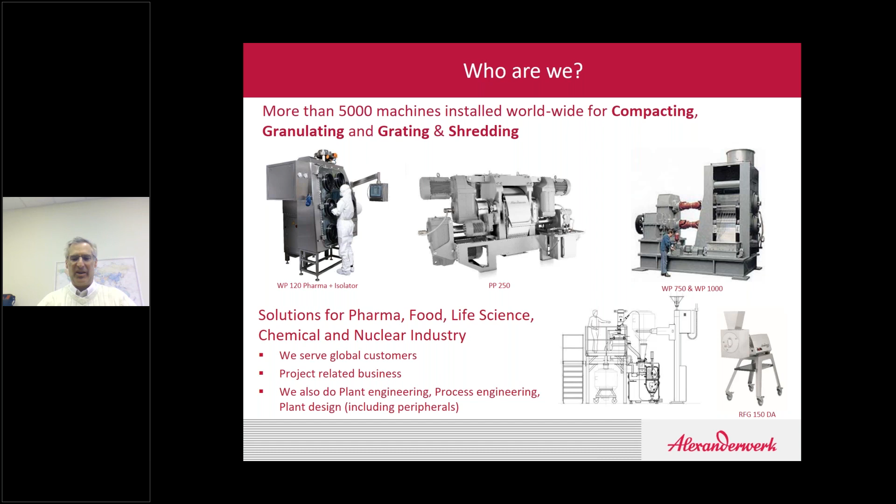Just to give you a quick background, Alexanderwerk was founded about 130 years ago. We specifically focus today on selling roller compaction equipment throughout the entire world, focused on pharmaceutical, fine chemical, life science, and nuclear industries. We cover literally the entire world. Our headquarters are in Remscheid, Germany, and our American operation is about a half an hour north of Philadelphia.

So what were we doing? We were looking at trying to take a powder material, which was very fine in form, and convert that into a free-flowing granule. I'll talk a little bit about why we're doing that, and there are many reasons. So we're taking a powder, and just through compression, we're compressing that powder into flakes. Those flakes are then gently milled up into what's known as granules, and the granules go on to one of Robert's tablet presses, and we make tablets from those granules.

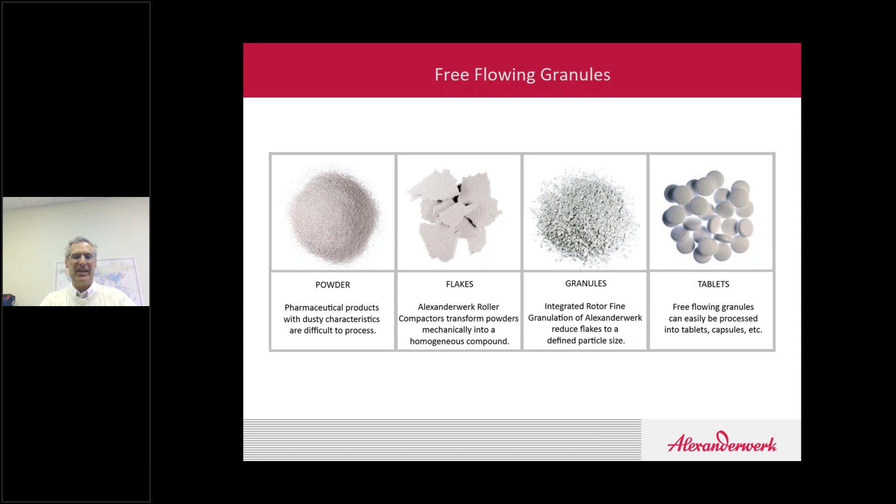One of the key reasons for making granules is to enhance the flowability. Some of you may know, tablet presses run at a very high speed - they can run in excess of 250,000 tablets per hour. So the material must flow into the tablet presses uniformly and smoothly. One of the main reasons we prepare granules is to avoid segregation. You have to have a very homogeneous mixture of material going into the tablet press, otherwise you'll have an underdose or an overdose of the material coming out.

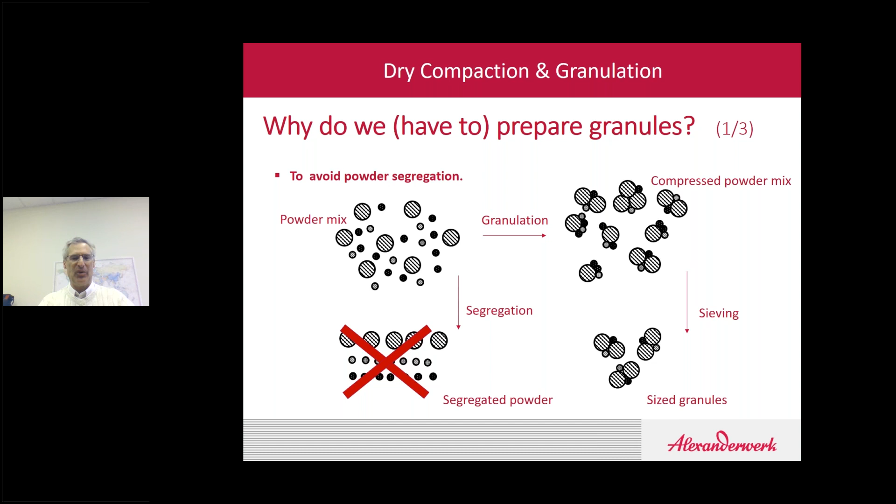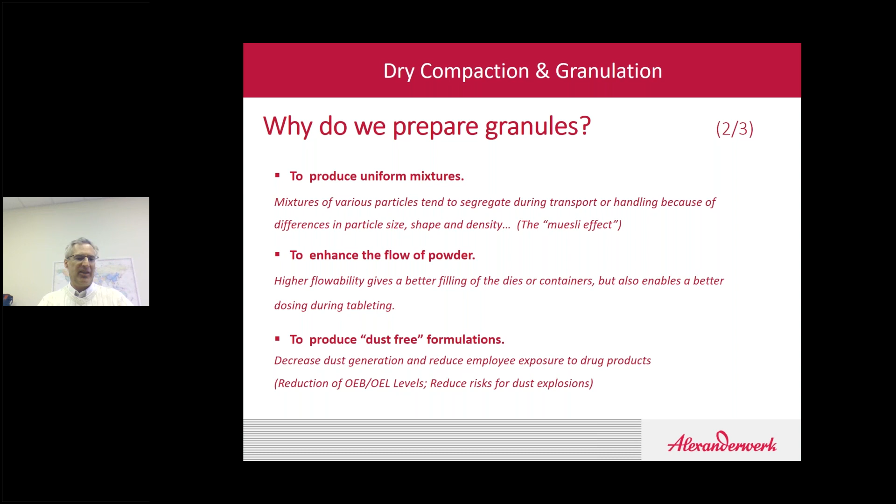So we want to make sure the powder doesn't segregate as we move to the next process step. Other reasons we prepare granules are to produce uniform mixtures, enhance the flow of the powder, and also to make a dust-free formulation. Today, you hear quite often in the industry that OEB or OEL levels are always a concern, and dust is always going to be a problem. You have to address that - the more dust you have, the larger the concerns for OEB or OEL exposure risk.

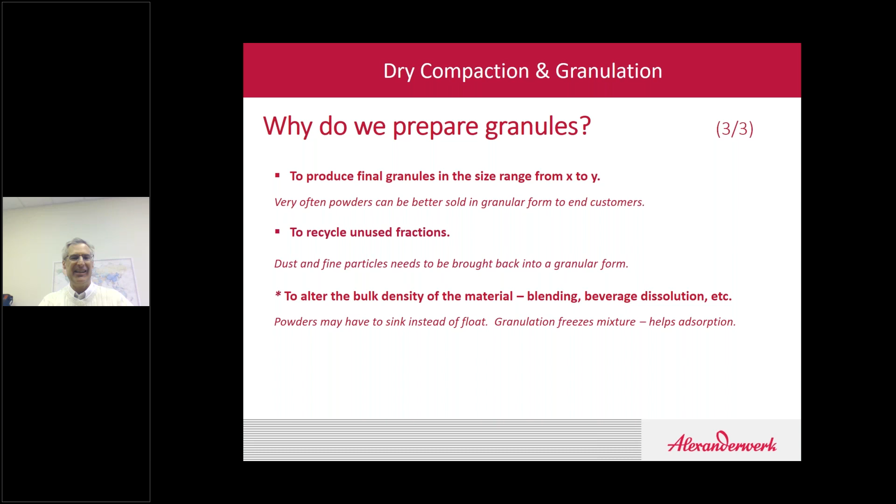Some other reasons: we may want to produce a final granule in a certain particle size distribution range from X to Y. We may also want to recirculate some unused fractions of a material, and sometimes we have to roller compact material, or dry granulate, to alter the bulk density of the material. This can get into a long discussion, but basically what you're trying to do is target having all the material going into your final blend be a similar bulk density and similar size so you can avoid segregation concerns.

So how do you prepare granules? There are three different methods, and Rob and I looked at a couple different methods. What we're going to be discussing in the next 20 minutes is how you do it using dry granulation. Sometimes you can just do a direct compression, which is easy and quick, but it doesn't always work. Then you may opt for a more intense method, which would be dry granulation. And then also there's wet granulation, which is the most involved method.

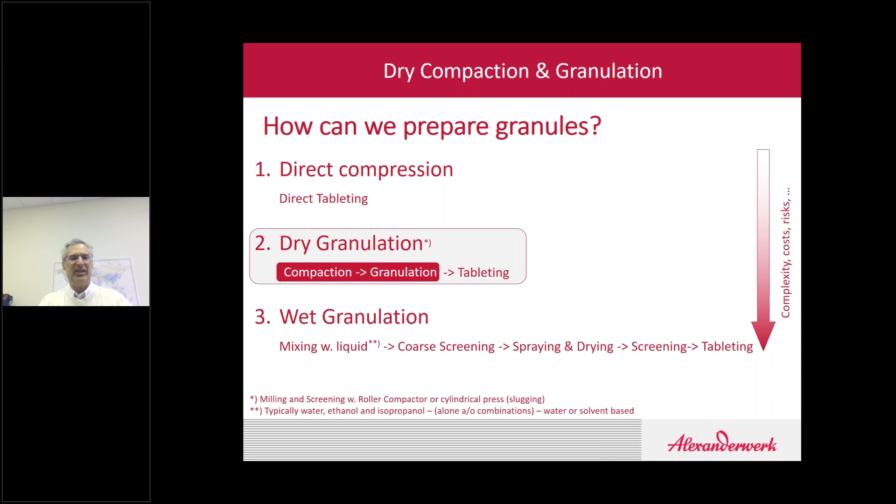So today let's talk about dry granulation using roller compaction technology. Dry granulation using a roller compactor is actually a continuous process. Alexanderwerk has quite a few machines that run on a 24/7 basis, mostly in the fine chemical industry, but it could be done in the pharma industry also. So it's a continuous process, and it's very reproducible. When you run a roller compaction process, providing you have the same input parameters and the same machine parameters, it's going to be a very reproducible outcome.

Interestingly enough, doing roller compaction, you don't need any additional binders or water or other types of binders that may be available. It's simply a system or technology that uses the van der Waals forces between molecules to compress those molecules together and hold them into a solid flake, which we then grind up into a smaller granule. Another major benefit is there's no additional thermal processing required.

So if you have very heat-sensitive APIs or volatiles in there, there is no thermal concern about the material being processed. A lot of customers ask, what kind of a delta T do I see across the system as I'm running a roller compaction process? Typically it's limited to about 3, 5, 10 degrees Celsius, maybe from beginning to end.

It's very low energy consumption, obviously, since we're not putting a lot of heat into the product. We don't need to spend a lot of energy to do this operation. Low investment costs when you look at it versus wet granulation, and it's a very small space or footprint that's required to have this technology on board.

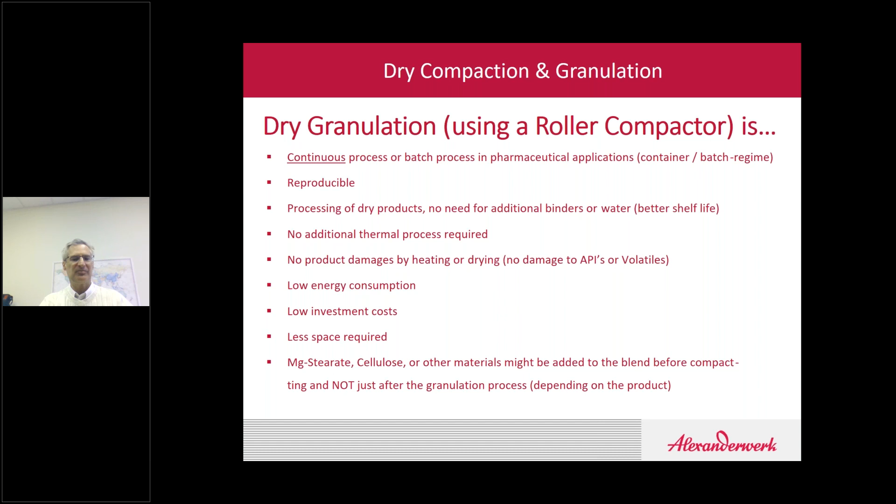So what's actually happening in roller compaction? Here's where it gets interesting. What we're doing in a roller compactor is we're taking two counter-rotating rolls and we're presenting material to these two counter-rotating rolls. The material enters these two counter-rotating rolls in an area that's first called the slip region, and then the nip region.

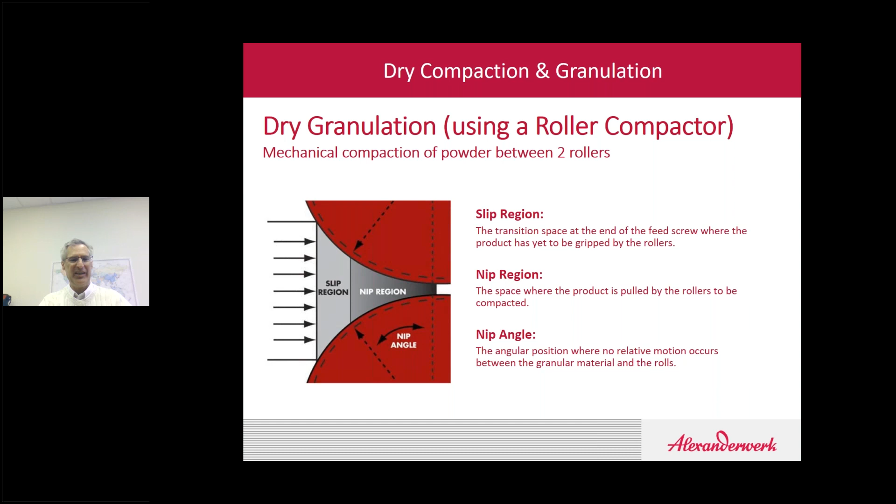So in the slip region, the particles are rearranging themselves, basically finding a space that they can fit into. And then in the nip region, the particles have no more mobility. They're simply being compressed, to the point where the two counter-rotating rolls are at their smallest point, and that's going to also determine the thickness of the flake coming out of the machine.

Interesting view here. If you take a look at one of the machines that we have, it's a WP120 pictured here. You can see the pictorial diagram on the left-hand side, and on the right-hand side an actual cutaway view of the machine. What we've done is removed one of the side seals of the machine.

So you can see in the middle there, there's the outlet of the feed system. The powder, as you can see, is getting compressed, and directly there is a very definitive line of where the powder has actually started to compress into the flake form. That's where that region transfers from the slip region into the nip region. We'll talk more about that in the upcoming slides also.

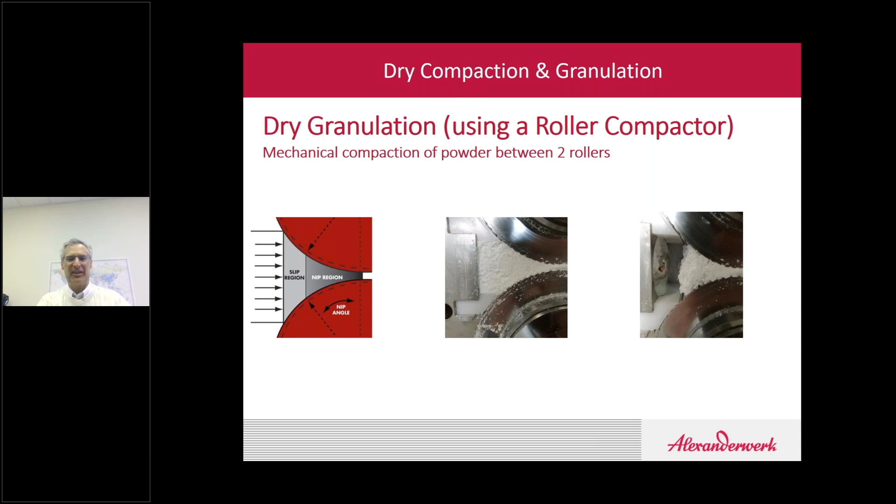The Alexanderwerk machines actually have vertically aligned rolls and a horizontal feed screw. There are some distinct advantages to this technology because we use our feed screw more as a metering screw. We're actually removing the effects of gravity.

So when you're processing a large batch, and in the beginning, if you're feeding with an IBC for example, you may have say 3 or 4 or 5 feet of head height of material over your feed screw. By using a horizontal feed screw, it takes away the effect of gravity. So we don't want to see a higher pre-compression at the beginning of the batch versus the end. For that reason, our technology using the horizontal feed screw is very favorable.

The two counter-rotating rolls are interesting to talk about also. They give you a specific advantage when it comes to separation of side seal leakages. Although it's typically minimized on the Alexanderwerk design, if you do have any material that leaks out between the vertically oriented roll assemblies, you can take that material and divert it away from the rest of the process and recycle it back instead of running it through the granulation mills.

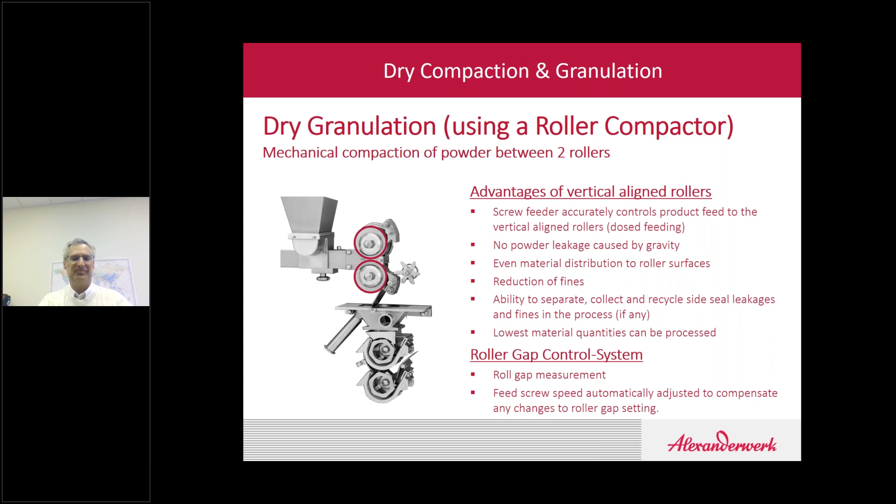Let's take a little bit closer look at the granulation aspect of the Alexanderwerk machines. We talked about the compaction, which happens between the two counter-rotating rolls, and the key to granulation actually is to take those flakes and mill them into a granule. I actually find the milling aspect of it a little bit more challenging sometimes than the compression aspect.

And the way Alexanderwerk handles this is we have actually a multi-stage granulation system. So the material will exit out from the counter-rotating rolls in what we call flakes. Those flakes are gently milled up at first by what's known as a flake crusher. It's basically a rotating set of knives or rotating set of fingers that rotate very slowly, about 50 RPM roughly.

Once those flakes exit the flake crusher area, it falls into a two-stage size reduction or granulation step. We call these the RFGs, or rotor fine granulators. The first granulator the material sees has a screen that's roughly 3 or 3.15 millimeters, reducing the half-inch flakes down to about 3 millimeters. The lower screen in the bottom RFG controls the top size of your material, typically about 1, 1.2, or 1.5 millimeters, depending on the process we're running. By using this multi-step size reduction concept, we generate the minimal amount of fines possible.

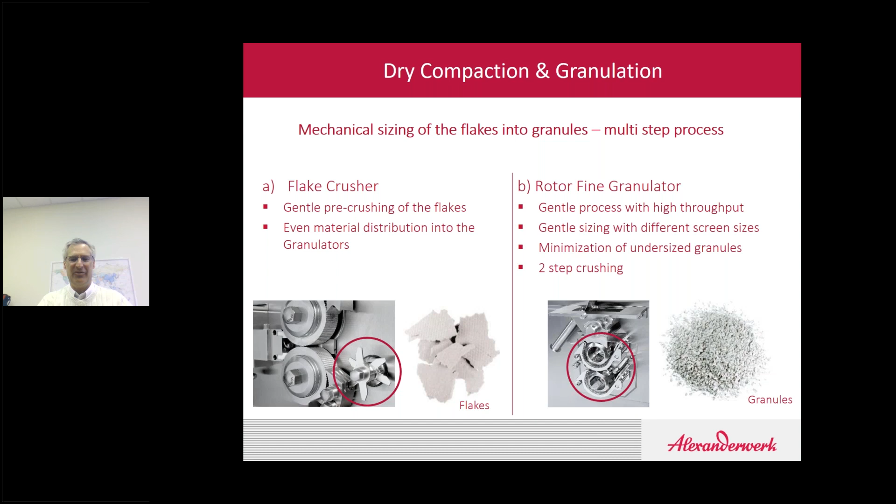Let's look at a side view cutaway of the actual roller compactor again. You can see it has the horizontal feed screw I talked about, but the feed hopper is an interesting design, called the combi vent feeder, a combination vent and feeding system. As the material travels down through the feed screw and gets presented to the rolls, the air has to go somewhere. Remember, we're compressing and compacting the material, removing air from it. Interestingly, with this design, the air actually travels back through the center of the feed screw and exits out the back section of the combi vent feeder. It's an interesting phenomenon to watch, and it works very, very well. It's actually a patented design from Alexanderwerk.

To enhance removal of air from the product, we use vacuum at the end of the feed screw. The vacuum has a twofold benefit: one is to aid in deaeration, but the bigger benefit is to pull the material out against the side of the feed screw housing. By doing that, the feed screw acts more as a metering screw. Instead of the material spinning with the feed screw, it's stuck to the outside of the housing, and as the feed screw passes by each revolution, it grabs that material and transports it right to the counter-rotating rolls. Using this technology, we have a very accurate transport system to the counter-rotating roll assemblies, giving you a very uniform product.

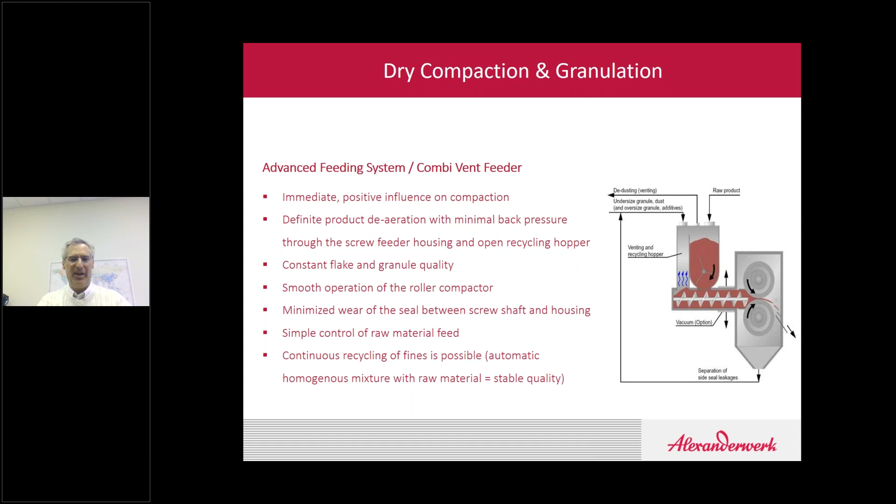Let's take a closer look at the vacuum deaeration system. This is a side view from a system with a dual feed screw setup. You can see the vacuum ports or housing right before the roll assembly on the far side. It's typically a sintered metal element of very fine porosity, so we're not pulling any product through it into the vacuum filter.

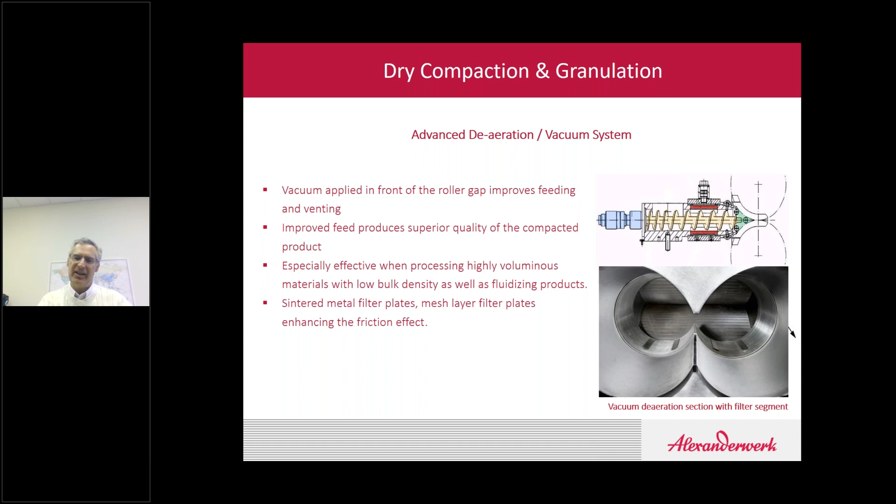What are we actually trying to achieve? The goal of having a good feed system or metering system to the roller compactor is to produce a very uniform flake. Looking at the two pictorial diagrams here, they're actually NIR analysis. On the one on the left, you can see the sides of the flake for this particular design were kind of weak. The red you see in the center is what we're looking for. When we run the vacuum and have the system optimized, you get a very uniform flake density, like you see on the right-hand side.

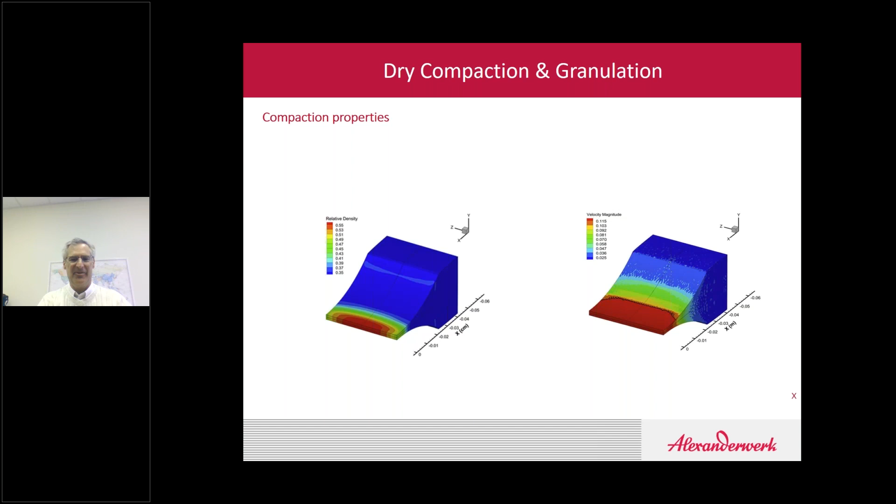So what are we actually doing in roller compaction? Dry granulation using a roller compactor really is changing the bulk density of the material. We're going to look at this more closely and get into the theory by defining alpha. Let's call alpha the compaction or densification, which is the volume in divided by the volume out — the volume of material fed into the machine divided by the volume out of the machine.

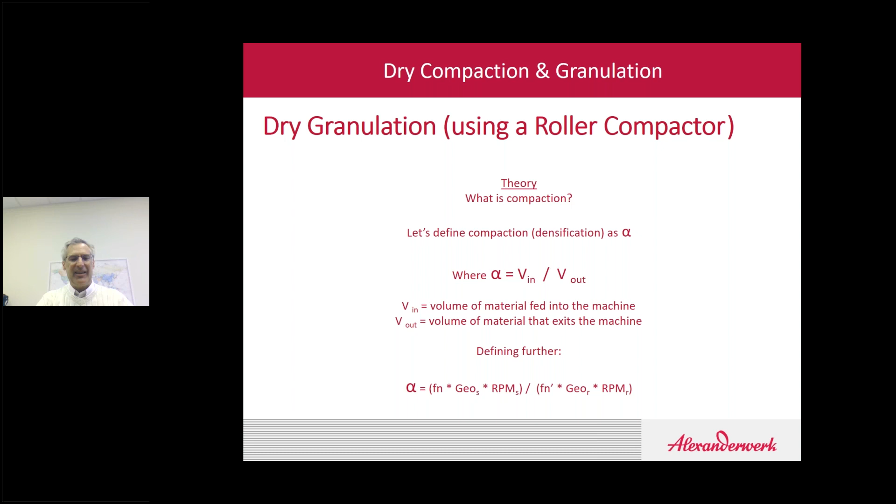If you want to look at this in terms of mathematics, we can throw in some geometrical and speed designs. Simplifying this in the interest of time, alpha is a function of the feed screw speed divided by the roll speed, times a constant, assuming the gap is held constant. So if you want to increase the density while the system is running, you could increase the feed screw speed or decrease the roll speed. If you want to decrease the density, you could decrease the feed screw speed or increase the roll speed.

You're always trying to work on that particular constant known as alpha and change that from one level to another. So theoretically, if you want to double your throughput, you could double the feed screw speed and double the roll speed.

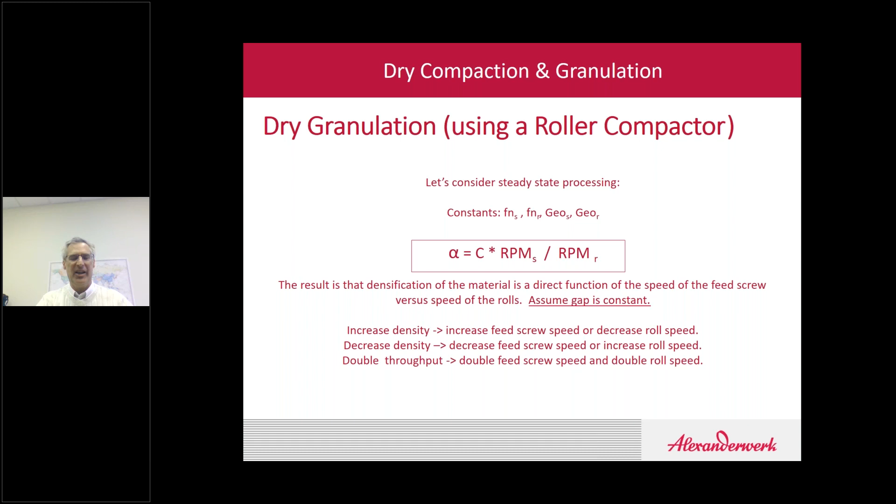This is really oversimplified, and we could spend a whole day talking about this. But for practical purposes, I'll run through a couple more scenarios so you get the idea of how the machines actually work. Let's assume we're trying to control our process, and we want to keep the roll speed constant, hold the hydraulic force constant, and keep the vacuum constant.

If I increase the feed screw speed, that means I'm pushing a larger volume of material into the roller compactor. What's going to happen then? The gap will increase—that's our resultant factor. Since the gap increases but the hydraulic force is constant, my alpha, my compaction force, is still maintained. Remember, on the Alexanderwerk roller compactors, the top roll typically floats and the bottom roll is fixed.

Let's take a look at another example of process control. Assume the roll speed is held constant, the feed screw is constant, the vacuum is also constant, and I increase the hydraulic press force. Just like on tablet presses, if I increase the press force, I'm densifying the material more—I'm squeezing it harder. So what actually happens is the gap decreases.

Another example: if we hold our roll speed constant, our press force constant, and our vacuum constant, and I tell the machine I want the gap to increase, what's the resulting factor? The volume out is actually going to increase. But in order to maintain alpha, the feed screw speed also has to increase to compensate.

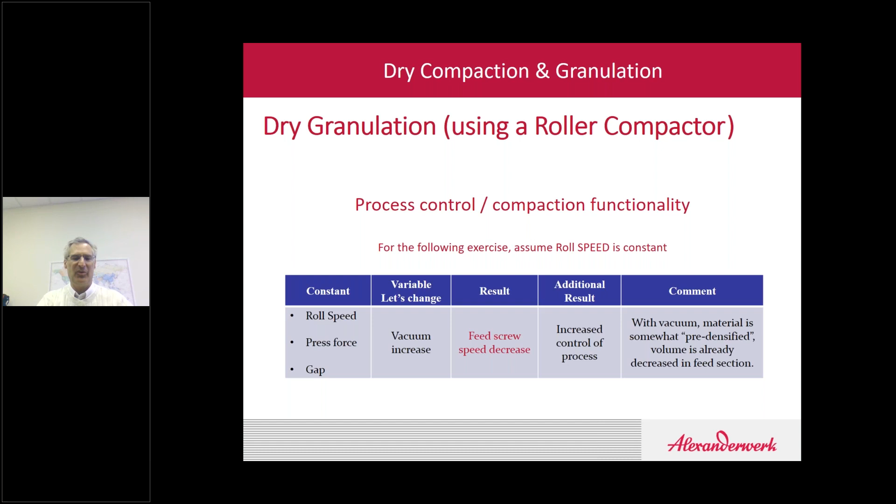Last one: let's assume roll speed, press force, and gap are constant, but I increase my vacuum. What happens is the feed screw doesn't have to work as hard, so the feed screw speed decreases somewhat. That gives me better control of the process, which is why Alexanderwerk machines typically run vacuum at relatively high levels, 0.7 to 0.8 bar negative.

What other adjustable parameters do you have in the Alexanderwerk machines? There's screw speed, which is adjustable, vacuum, which is adjustable, roll speed, which dictates the throughput of the machine, the compacting force between 2 and 20 kilonewtons per centimeter, and the roll gap, which is also adjustable. Different roll surfaces are available. We can also look at different side seal technologies available, and the granulator speeds and granulator screens can be changed in addition.

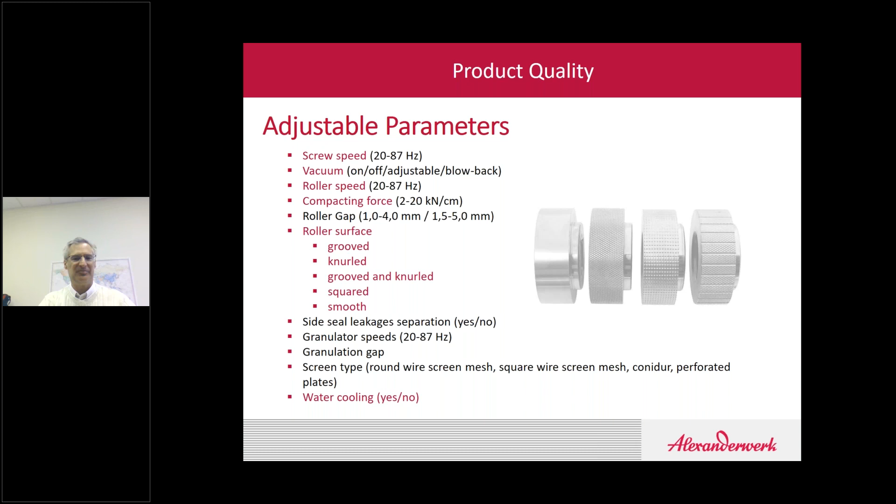Here's a typical setup of a roller compaction system. You can see you have a feed system introducing material into the feed hopper. The feed hopper transports the material to the counter-rotating rolls. The material is then size reduced by the RFGs.

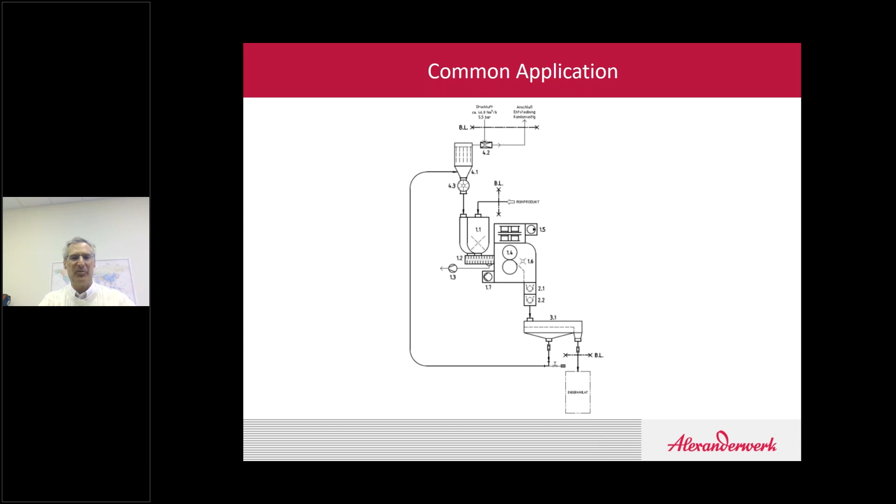Sometimes there's a screening deck, which screens out any of the fines if that's necessary for part of your process. Those fines can be recirculated and put back up into the feed hopper so we can produce granules within a certain particle size distribution that you're looking for.

All right, enough about the technology—let's take a look at what we did during this particular study with Natoli Engineering. We were given 3 different drug loads of acetaminophen, or APAP material: one was a 20% drug load, the next was 40%, and the third was a 60% drug load. All of them were blended with ProSolv 90 and 0.5% mag stearate for lubrication.

We took a look at the angle of repose of each of these blends. It was interesting to see that the higher the loading of the APAP material, the poorer the material flowed, which wasn't too surprising, because the APAP material is very, very fine and doesn't have good flow qualities to begin with.

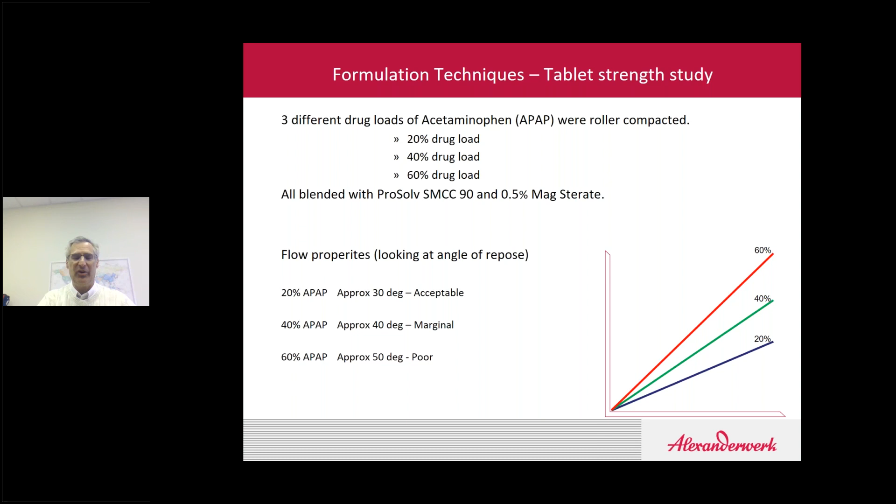At a smaller drug loading of 20%, we had approximately a 30-degree angle of repose. At a higher drug loading of about 40%, the material still flowed—it was marginal, about a 40-degree angle of repose. But when you got to the 60% APAP drug loading, the material really didn't want to flow whatsoever; it was poor flow, about 50 degrees.

The material was put into the WP120 from Alexanderwerk, configured with a 38mm diameter feed screw. We used 120mm diameter rolls, which is what the WP120 stands for, and the rolls were 40mm in width. The vacuum we ran was about 0.74 bar negative.

We used our flake crusher running at about 50 RPM, and then the 2 RFGs below. The first RFG had a screen of 3.15 millimeters, running at 50 RPM, and the final RFG had a screen of 1.25 millimeters running at 70 RPM.

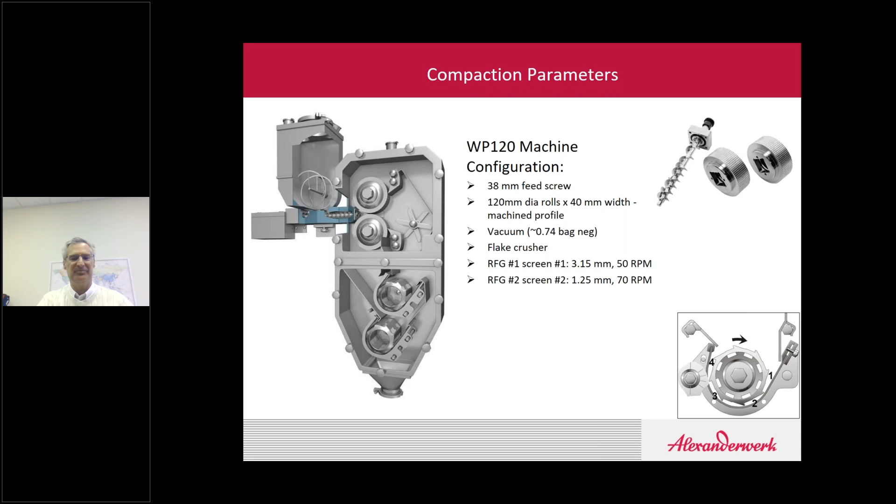Our parameters that we ran the system at, in order to be consistent across all 3 tests, was a hydraulic pressure of about 45 bar, roll speed of 5 RPM, and our gap setting was 1.4 millimeters. The feed screw speed had to increase accordingly from the lower drug loading to the higher drug loading. At 20% APAP loading it was around 25 RPM, at 40% APAP loading we were at 29 RPM, and at 60% APAP loading it was around 35 RPM. These are the average speeds the machine ran at. We just told the machine we wanted a 1.4 millimeter gap, set the roll speed, and the feed screw was modulated accordingly by the PLC system that controls the roller compactor.

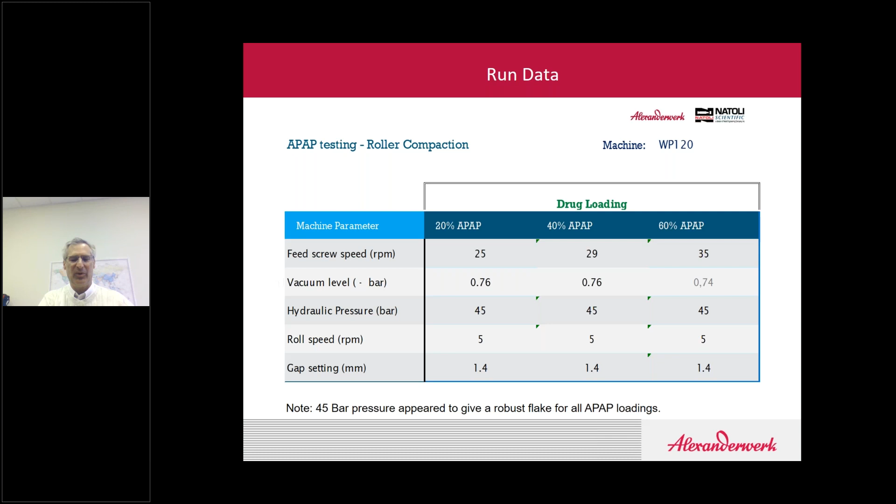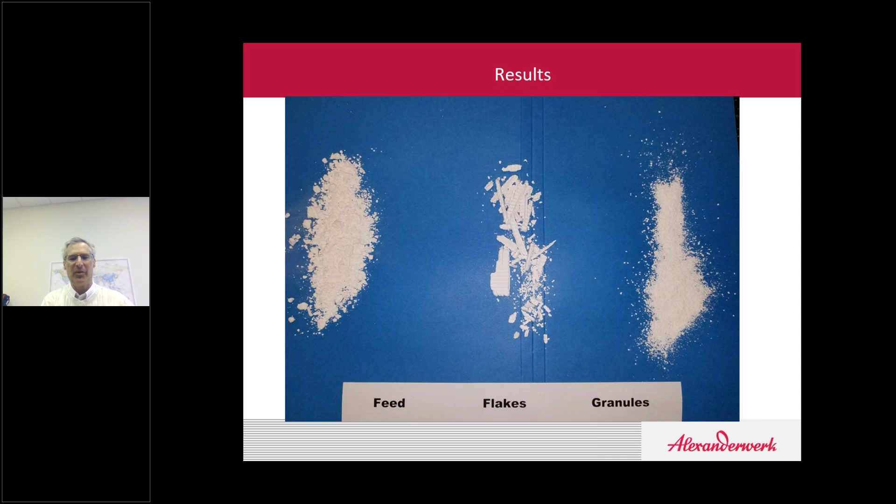Taking a look at the results, if you look at the feed material on the left-hand side of the screen, you can see it really looked like a very poor flowing product. I believe this was the 40% APAP I took a picture of here. Material did not want to flow. The flakes that we generated, this is the sample coming out after the flake crusher, was a typical flake that you see, each about 1.4 millimeters thick. After the material ran through the RFGs, we were able to produce nice flowing granules that you see on the right-hand side.

Let's take a look at some of the observations of the material that we saw in the end. The material did compact very well. It was a good blend. It ran smoothly, with no sticking to the rolls. The pressure was kept the same to minimize the variables from one drug loading to another.

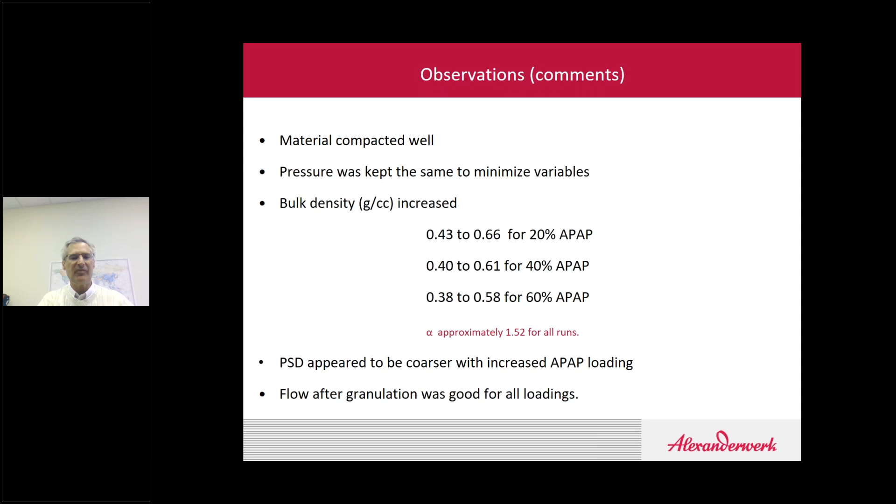You can see the bulk density did increase. For the 20% APAP loading, our bulk density increased from about 0.43 to 0.66. Keeping the same parameters, the 40% APAP drug loading took bulk density from 0.4 to about 0.61 grams per cc. For the highest drug loading, we went from 0.38 to 0.58. Interestingly, if you look at all these bulk density analyses, it gives you an alpha of approximately 1.5, 1.52 for all the runs. Also interesting to note, the PSD appeared to get a little coarser as we had increased drug loading. Not uncommon, but the bottom line is the flow after granulation was good for all the loadings.

The rest of the study, I'm going to turn back over to Rob and let him describe the findings that he had in his tableting.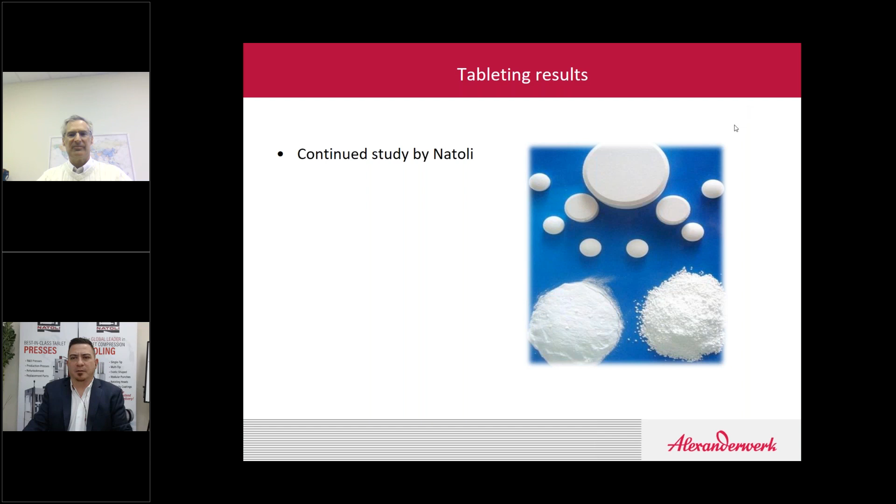All right, great. Can you guys see my screen? Yep. Very good. All right, thank you, Al, for a nice presentation on roller compaction dry granulation.

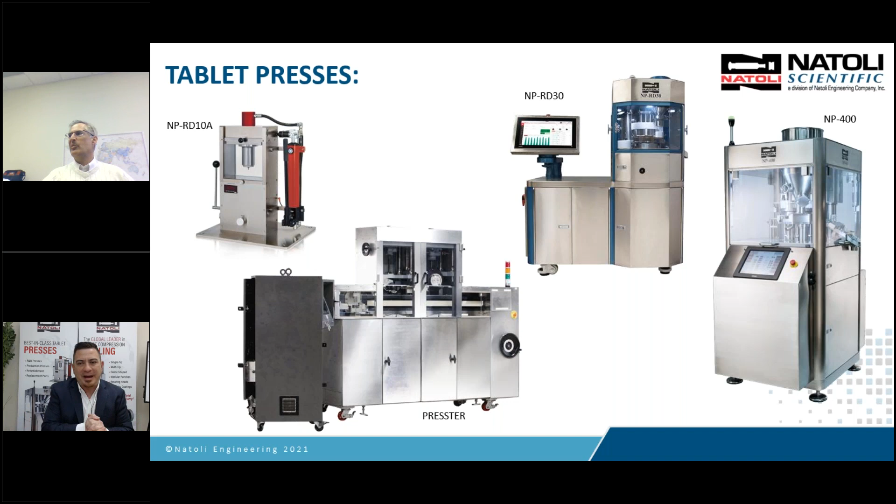What I'm going to talk about now is taking the material that was roller compacted to the tablet press. This is a 3-series event, and we're on our second. The first series, we evaluated the Presster, which is a compaction emulator. This is a single station press. Here's an image on the bottom. The punches are installed in carriages and travel through a linear track going through a dosing cam, pre-compression, main compression, ejection, and takeoff, with instrumentation to measure punch displacement and force. The advantage of this Presster was to run it at 1 meter per second, equivalent to most manufacturing speeds. This machine goes up to 2 meters per second, but we ran it at 1.

At this part of the event, I'm going to talk about the RD30. We then took that material and ran the RD30, performing tabletability studies and strain rate sensitivity studies. These are very important studies to perform at the R&D stage, because we want to find out the failure points of our material—too low or too high of a pressure. What happens? We see capping, lamination issues, disintegration and dissolution issues, and sticking issues.

Then we want to run a strain rate study where we start at slow speed and increase our speed to maximum speed, hopefully covering our full range of dwell time that'll run on production. The RD30 was actually designed for scale up, so it does reach over 1 meter per second at the top speed. The advantage of the emulator, as we've already talked about in our first series, is that you can use less material and get more data.

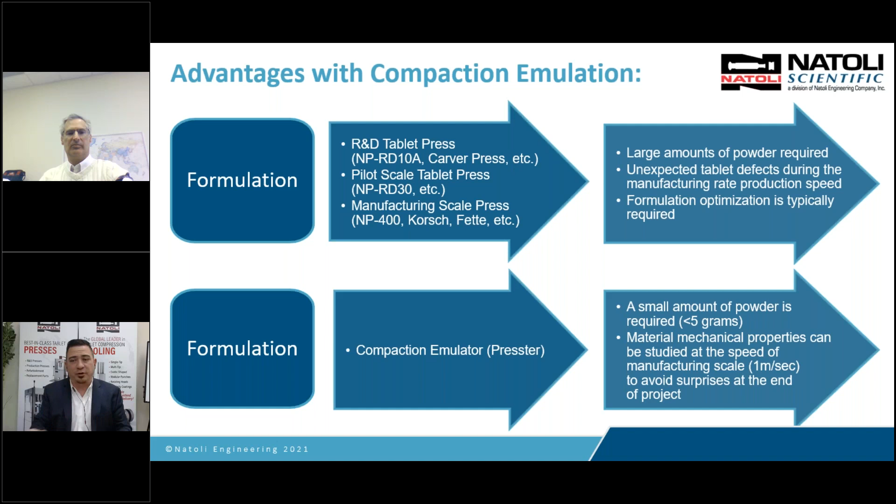But we eventually need to go to the rotary press system, R&D, pilot scale, and into manufacturing. So the RD30 is our workhorse for doing all of this compaction study and scalability into manufacturing. Like Al said, we basically have an APAP formulation, acetaminophen, at 20, 40, 60%. We evaluate direct compression, roller compaction, and wet granulation. Our focus here is to compare the roller compaction blends at 20, 40, 60 compared to direct compression.

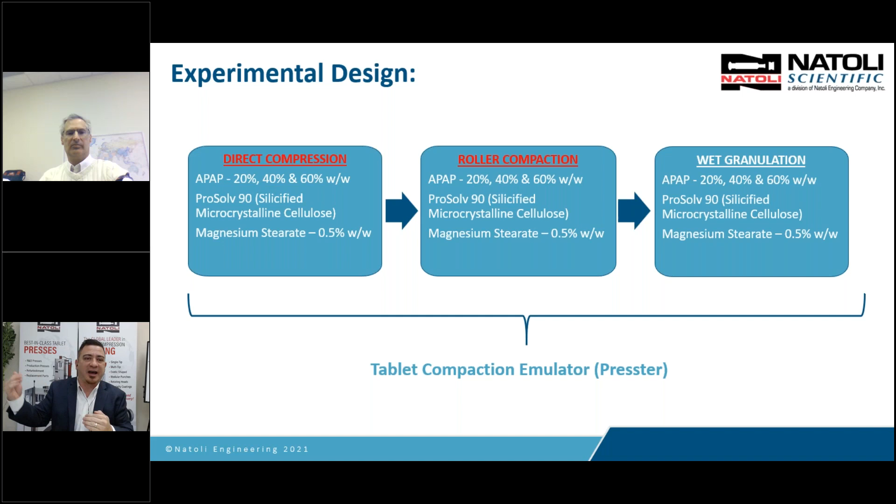If you're not familiar with these three processes: direct compression is the least expensive, where you take all your materials, sieve them, and blend them properly to create a homogeneous blend and then tablet. If you don't have good flow properties or compactability properties, then you granulate. So roller compaction is the next logical step after direct compression.

I went over this in the first event we had, but I think it's important to go through it again because we're going to focus on the rotary press process. This is an image of the rotary press process, starting with the upper punches installed, your lower punches installed, and then here's your die table with all of the dies. The first step in this rotary press process is the die filling.

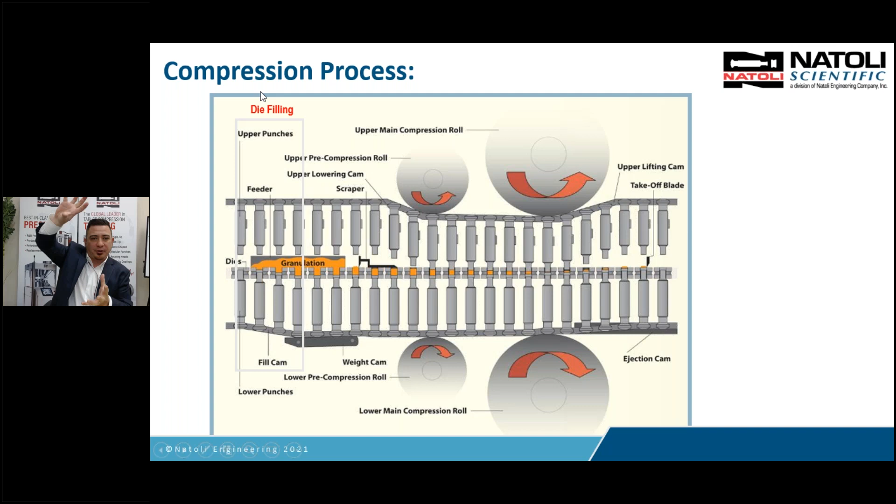So you fill your granulation material in a hopper and it goes into a feed system. There are two major types of feed systems: gravity feeders and paddle feeders, or force feeders. You'll notice here, here's our feeder and it says granulation on it. The fill cam is a lower cam that's going to start this process.

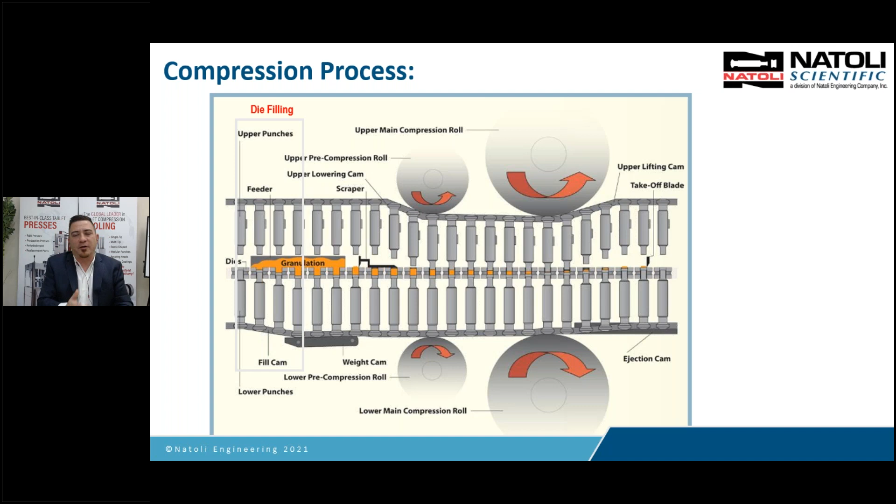What the fill cam does is pull that lower punch down and create a partial vacuum with that tight clearance between the lower tip and the die cavity. So when it pulls down, it creates a vacuum, and hopefully there's material above it, so it sucks in material. You'll notice in this image, as the fill cam pulls the lower punch down, there's granulation going into the die cavity.

There are a lot of older machines out there, and even newer machines, that are designed like the old model where the fill cam is pulling down before it gets to the opening of the feeder. So what it's doing is pulling in air. Now the die and the lower punch come underneath the feeder, and hopefully your product flows well enough that it goes into the die.

If your fill cam is positioned properly underneath the feeder, it will pull down and suck powder in with that partial vacuum. If you do have a machine out there that has this design where you're not pulling in powder at the fill cam, Natoli has a solution for you called Fast Track. We basically custom design your fill cam for your press so it does pull down underneath the feeder. This might be a common reason why you're having weight variations at high speed on your tablet presses, because this fill cam needs to be positioned underneath the feeder.

After the fill cam, you've got your dosing cam, or volume adjustment. It's a two-step process to fill that die: you overfill the die, and then the weight cam, or dosing cam, pushes the lower punch up and scrapes off the excess powder. So we overfill, and then we push out excess to achieve that weight. As we're pushing out the excess powder, the powder particles are consolidating, kind of tamping the air out and getting the particles closer together. That's going to give you a more consistent die fill.

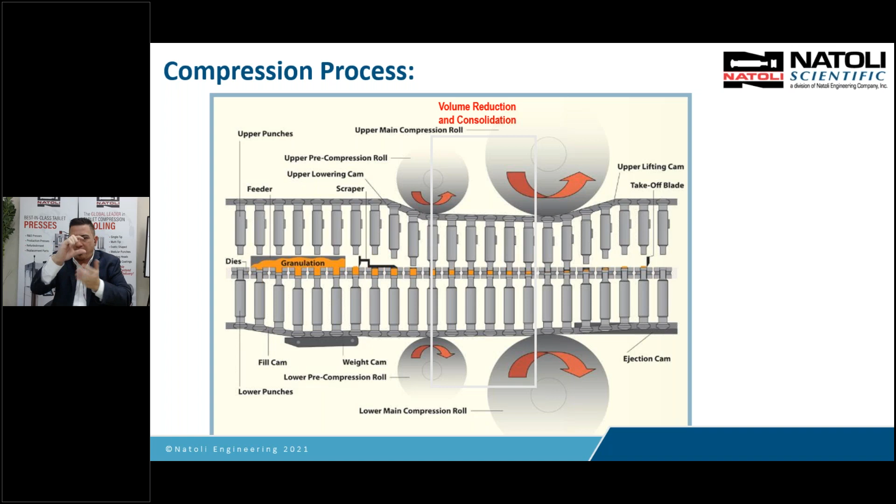The other roll, whether it's on the upper or the lower, is going to change your punch penetration - where in the die do you want to make that tablet. We typically make it at the high part of the die, but you have the ability to move that down in the middle and all the way in the bottom. That's called your punch penetration.

After the compression, you have your decompression stage. So what's happening in that die is you've got a die wall with your powder in there, the upper and lower punches come together to compress that material and form a compact. After compression, the upper punch is released first. So you have the belly band wall pushing against your die wall, you have your lower punch with the tablet pushing there, but you remove the load from the upper punch.

So the tablet wants to expand upward. And then when you eject the tablet, if you've got a lot of internal forces in that material, as soon as you pop that tablet out, it pops off - called capping. So the decompression stage is usually where we have most of our capping and robustness issues.

After the decompression, you have two more stages, and they're often confused as one, but they're different. The ejection has to remove the tablet from the die wall, and it has to overcome that residual die wall force and the friction between the compact and die wall to get that tablet out.

If you have a high ejection force, you want to reduce that by either doing one of two things: reducing the residual force by reducing compression - most of the time we can't afford to do that - or adding lubricant to your formula to reduce that friction so the tablet comes out easier. That's magnesium stearate, stearic acid, and so on. There are a lot of different lubricants out there, and you put some of that lubricant in to satisfy the ejection.

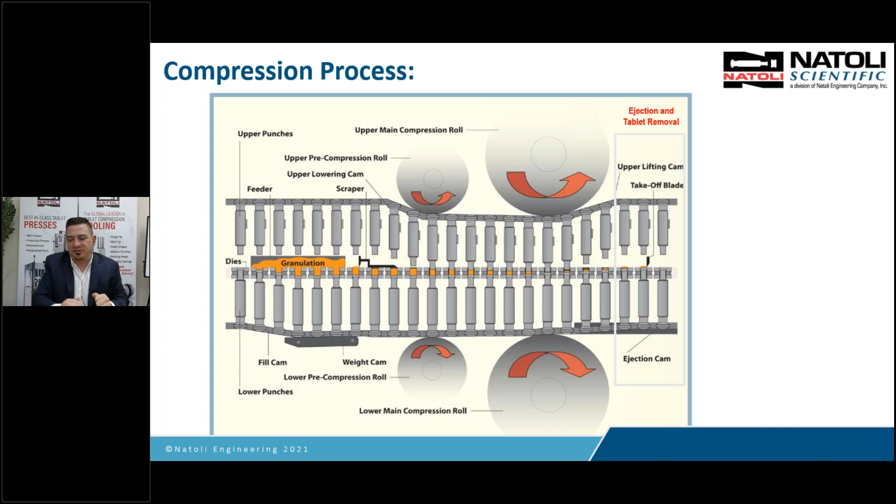So that's the rotary press process. And now what we're going to do is talk about the APAP 20, 40, 60% blend, comparing that to the direct compression and roller compaction process.

Well, here's our RD30. We use a BD combo turret. You can get this in B tooling and D tooling, or like what I have is a BD combo, so I have flexibility of using B tooling or D tooling on the same turret and just change the cams out. It's a very quick process.

But what we did here is we ran a tabletability profile. What is a tabletability profile? Typically, a compaction profile is we incrementally increase our compression force levels, and we measure the tablet hardness or breaking force. We can look at this at force and breaking force, but I normalize the data for megapascals pressure, which is the force divided by the cross-sectional area of the tooling.

And I'm also looking at the tablet tensile strength, which is the tablet hardness, then normalized to tablet geometry. So we take into account the tablet geometry, the hardness, and we use the Fell-Newton equation to derive the tensile strength. Why do we do this instead of looking at force? Well, as we increase the mass or the size of our tablet, it's going to require more force to make that tablet. But if we take the force divided by the area, we normalize for the tablet geometry.

Now we're talking in terms of pressure. So if somebody says to me, hey, I compress this tablet at 100 kilonewtons of force, immediately you're going to think it's a very high force. 100 kilonewtons is very high for tableting. But if your tablet size is, say, 3-inch diameter, 100 kilonewtons isn't a lot.

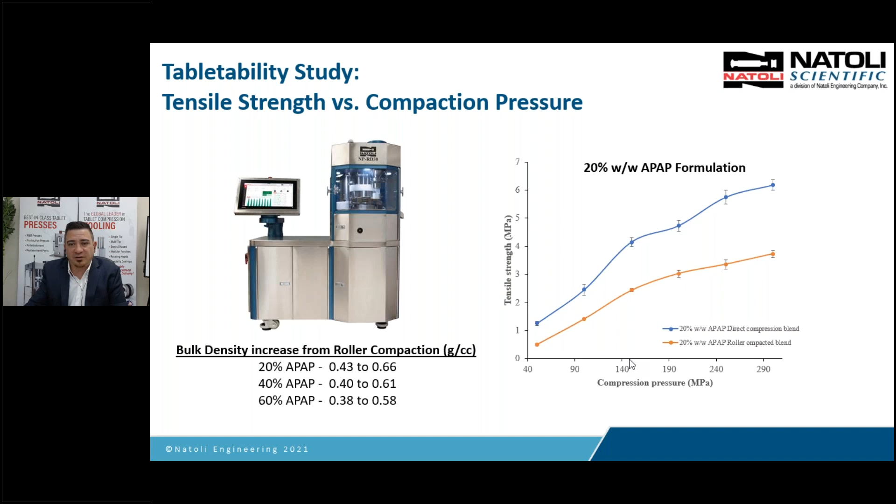Let's look at 40% drug load. As we increase the drug load, if you remember from series 1 that we did, increasing the drug load of APAP increases the elastic rebound. So we looked at the yield of plasticity and the yield of elasticity. Plasticity is our friend in tableting because when you have plastic deformation, it represents permanent deformation. It creates bonding and usually results in a strong compact. Where elastic recovery usually results in a weak compact, very low hardness, very low tensile strength, capping issues, lamination issues.

So when we increase our APAP drug load, we know from our compaction simulation data it's not favorable on the tableting process. But let's look at the tabletability profile on the RD30 - tensile strength versus compaction pressure again. With 40% drug load on the APAP, we were able to achieve our 2 megapascal at a higher pressure because we had 40% drug load. It took about over 140 megapascals of compaction pressure to achieve that 2 megapascal tensile strength.

How about the roller compactor? The roller compaction process, we needed quite a bit more. We're in a 250, 260 megapascal pressure range, which is still not excessively high. It's on the higher side. Like I said, 100 to 200 is typically where pharma runs, but 240, 250 is not unheard of. Most of your tools will stand 500, 600 megapascal unless you're using some exotic shapes and you've got logos, and that starts to weaken the steel, but it's still very doable.

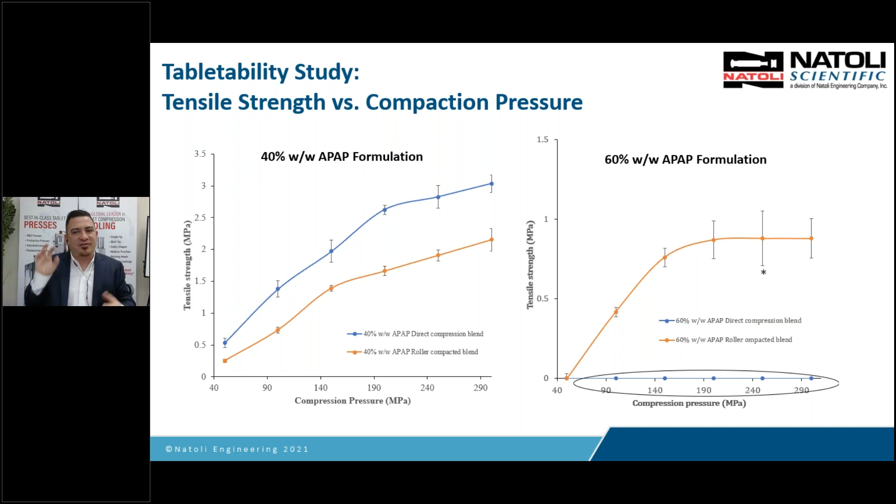Once we get higher in the compaction pressure, we're getting close to this curve and its plateau. Now we're going to run strain rate studies because I want to see what happens if we increase our turret speed, which means we reduce our compaction time. When we reduce our compaction time with APAP, you're going to get that elastic recovery. You're going to have more issues. So now we got to do a speed test.

So what we did here is we kept the compression force or compaction pressure constant. And what we want to do is run the RD30 at a slow turret RPM and collect a sample of tablets, then increase the speed, collect a sample of tablets. Do that all the way to the maximum speed, which is above 1 meter per second. So here are examples of strain rate studies. I want to know what happens to my material as I increase speed.

Okay, so let's look at the direct compression. 20% APAP is the blue. Notice we start at a tensile strength of about 1.9 megapascal, and it is dropping, with a slight increase here. So the 20% APAP doesn't show a significant amount of strain rate sensitivity. It doesn't drop too much. When it's roller compacted, it's very similar. I wouldn't say that roller compaction is increasing the strain rate sensitivity because they both have about the same trend going on here. So there is some sensitivity, but it doesn't seem very drastic.

So now we go to 40% APAP. As we increase the drug load, we know we increase the elastic recovery, again all from the compaction simulator data, looking at Heckel plots and work curves. We did increase our strain rate sensitivity. So when you increase the drug load from 20% to 40%, you'll notice there's a bigger drop in our tablet strength as we increase speed. For both the DC grade and the roller compacted blend, both of them are strain rate sensitive when you get to that 40%. At 20%, not so much.

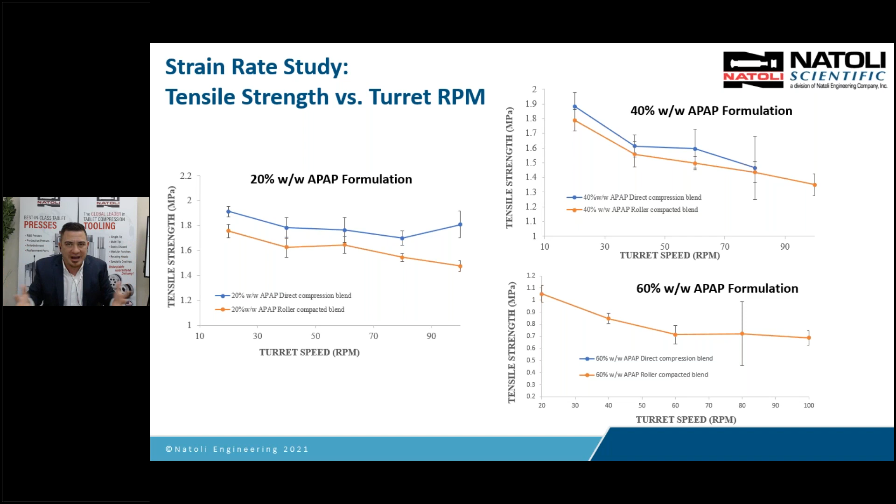Okay, in the tabletability profile, we normalized for tablet geometry and the cross-sectional area of our tooling, so now we can compare tablets of different sizes. How do we do that for the strain rate study? Instead of looking at turret RPM, we want to normalize for that as well. I would not run my R&D machine and say, hey, I ran this at 50 RPM and I had great tablets, now go ahead and run your big Natoli production press at 50 RPM, you should expect the same results. That's not true. You have to normalize for something called a pitch circle diameter. And that's what this is all about here.

So here's the RD30, this is the turret on the RD30. The pitch circle diameter is a measurement from the center of die to 180 degrees, center of die. That is your pitch circle. On the RD30, it happens to be 200 millimeters. So if you know the pitch circle diameter and the RPM, multiply that by pi divided by 60, you get something called tangential velocity, the velocity in millimeters per second.

So now if I ran my R&D press at, let's say, 1,000 millimeters per second, which is 1 meter per second, and I got great results, now I can confidently say transfer that into your large machine, but run that machine at 1 meter per second. The RPM will be different because the turret size is different or pitch circle diameter is different, but if you're talking in terms of velocity, millimeters per second and meters per second, that's normalizing for the turret size.

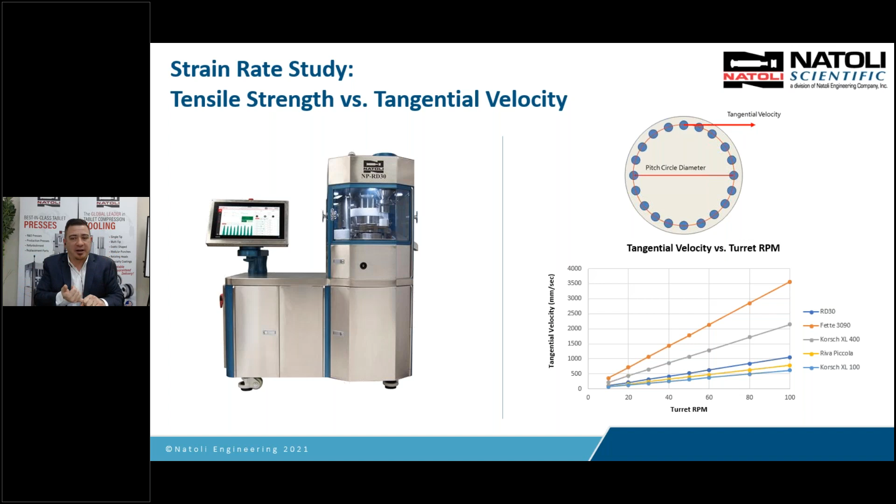Some presses are running at 600 to 800 millimeters per second, others at slow speed. But the larger your turret or pitch circle gets, the higher that velocity is going to be at a constant RPM.

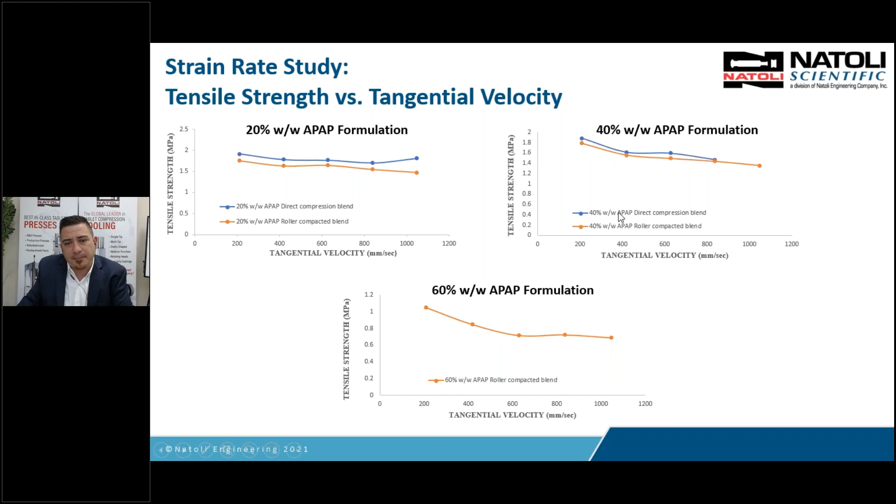Another way of looking at this is dwell time. Dwell time's been used for about a century, where it's a function of the head flat and the tangential velocity. The larger the head flat, the higher the dwell time. When that punch hits the roller, it comes down and is consolidating. When it hits the head flat, it's no longer moving vertically - it's held at a constant strain, moving horizontally under that head flat, that constant dwell in milliseconds. That's influenced by the size of your head flat and the turret velocity.

So when you order your punches from Natoli or wherever your tool manufacturer is, and you don't specify the head flat, you're going to get a standard head flat for B or D tooling, BB. But please note that there are different head flats available to you.

So if you're doing these studies in R&D, or you're in manufacturing having capping problems, this might sound counterintuitive, but most companies think when you increase your dwell time, you increase your tablet strength and robustness. That's not always the case, although it is for a lot of products out there, a lot of literature on it. But there are some products that actually benefit from a lower dwell time and a smaller head flat, because that influences the consolidation time and the time to tamp the air out and get that material consolidated and compressed. So note there are different head flats available to you.

In R&D, I would run strain rate studies, and if I found my material was strain rate sensitive, I know head flat is going to play a major role in the success in manufacturing. So here's examples of different head flats for D and B, and here's an example of these dwell times as a function of turret RPM with these different head flats, so you'll see how dwell time is influenced by using different head flats.

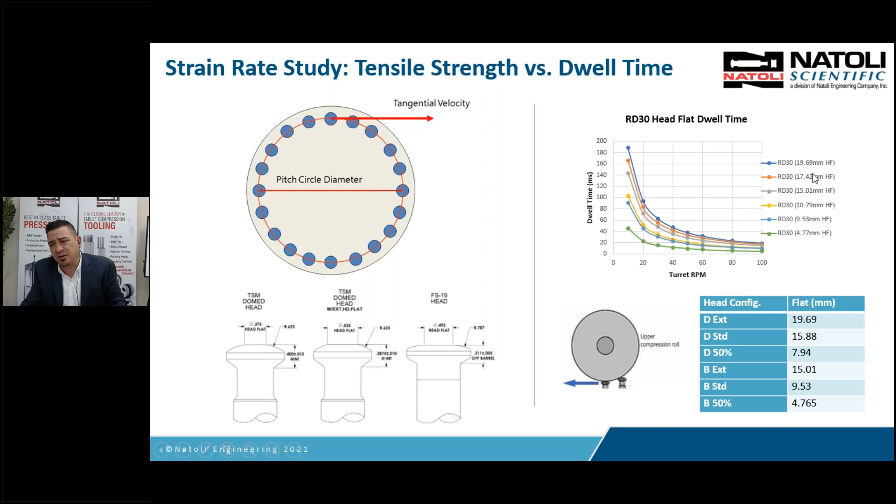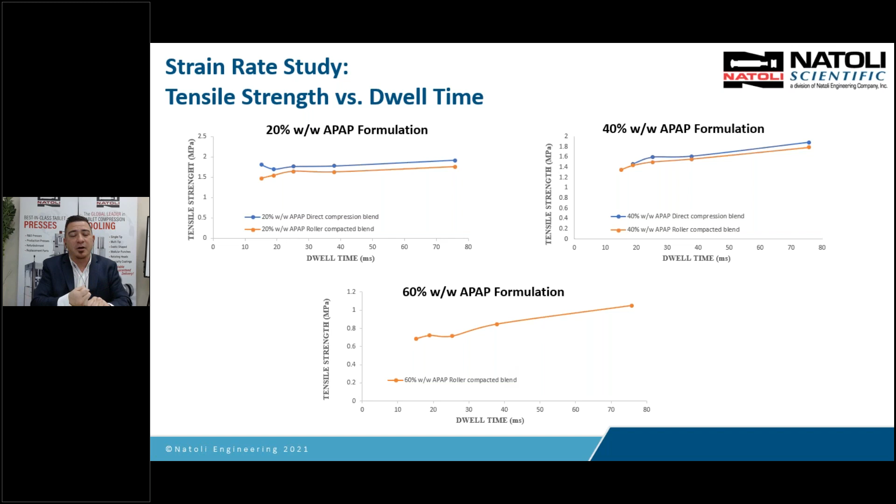This is the same strain rate sensitivity study we looked at with RPM and tangential velocity, but now I change the x-axis to dwell time. So if you know the dwell time of your manufacturing press, let's say it's running at 15 milliseconds, you can say at 15 milliseconds of dwell, I am making a robust tablet, or at another dwell time, I'm still making a robust tablet, and so on. So you can look at RPM, but I suggest you convert it to either tangential velocity or dwell time.

One last thing I want to talk about when scaling up and comparing presses of different sizes is the punch vertical velocity - also called consolidation time, vertical velocity, or loading rate. This is a function of the compression roll diameter. If you had a real small roller, that punch hits the roll and comes down real fast. If you had a real large roller, the punch hits the roll and comes down at a slower velocity, giving it more consolidation time to get the air out.

But let's say, for example, I've got a press with a small roller and a press with a large roller, but the same head flat for both presses - say it's 9.5 millimeters. Well, on a small roll, that punch is going to hit and come down fast, a fast consolidation time, and it's going to have a dwell time that's appropriate for that 9.5 millimeter head flat and the velocity.

If I had a large roll, the consolidation time is going to be much longer, but if it's got a 9.5 millimeter head flat, the dwell time is going to be the same. So even with a small roll and big roll, if your head flat's the same and your turret velocity is the same, your dwell time's the same. But what's different is for a large roll, you'll have more consolidation time, more time to tamp the air out and consolidate those particles. So the roller size is very important.

If you take a look at new machines today, you'll notice that the pre-compression roller is the same diameter as the main compression roller. Why is that? Because the pre-compression purpose is to get the air out and consolidate. So the larger the roller, the more effective that pre-compression is going to be. Where if you had a small roller, it's not going to be as effective for pre-compression as a big roller. So it's not the amount of force you put on—although if you put too much force and create bonding, that's an issue. But the more time you have to get that air out and consolidate the particles will benefit pre-compression.

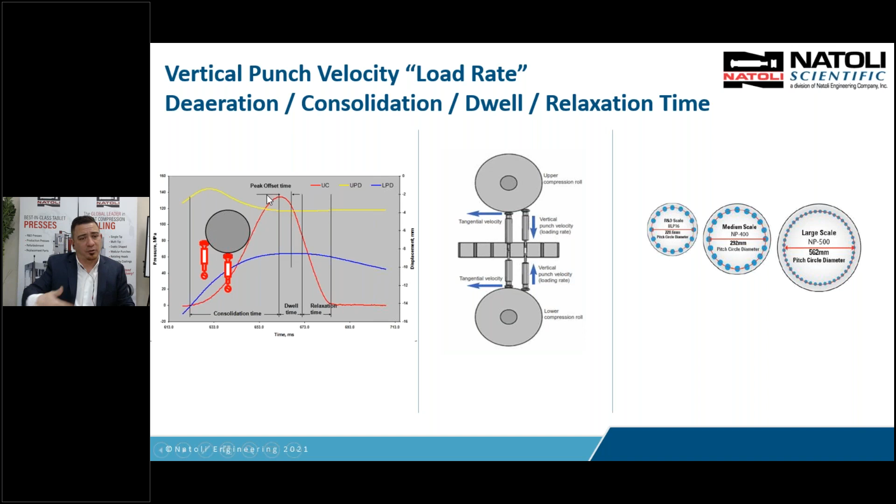This program is using peak to 20% on the unloading. Some programs use 10% to 10%, but the time's still the same—it's a function of the head flat and the turret tangential velocity. Then you have the relaxation time right here. This is the whole compression event, so dwell time is just a small area right here. Consolidation is a huge part of this compaction event. So the compression roll diameter and the turret velocity play a role on the consolidation time. This is very important for us to understand.

Okay, just a quick summary. In the first series, we talked about compaction emulation. If you guys didn't get the video link, please let me know and we'll send that to you. We talked about how to characterize material deformation properties—elastic materials versus plastic materials versus brittle fracture—what does that mean to us, and how does it help us select the proper excipients and diluents to make a robust tablet. We normalized all the data.

Then we looked at the rotary press process, where we looked at different feeders. The fill cam dosing is very important to us. We talked about the pre-compression and main compression. We also talked about how ejection and takeoff are two separate stages—this is often confused as one stage. If you're having a takeoff sticking issue, don't just add mag stearate and think it's going to fix it; you're actually creating more issues for yourself. So if you have ejection issues, we approach it one way. If you have takeoff issues, we approach it a different way.

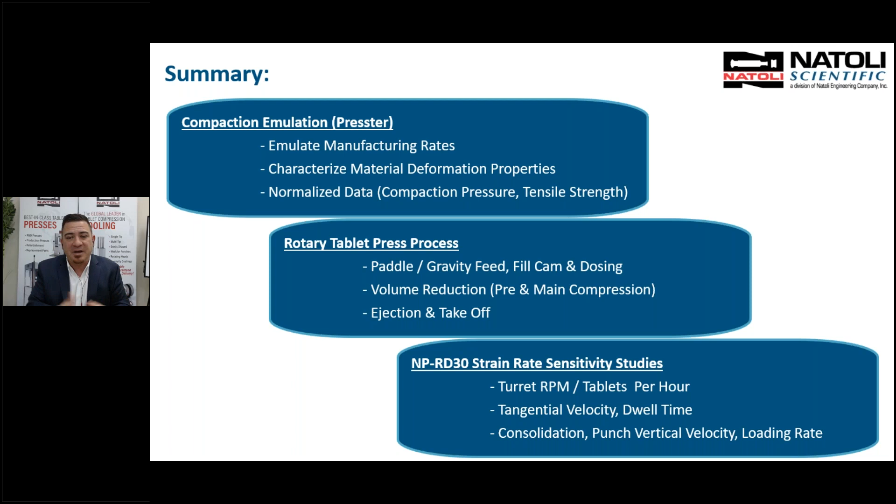And then we also have the strain rate sensitivity studies, where we look at how our material behaves at different loading rates, different tangential velocity, different dwell times or RPM. So we normalize all of this data. With that being said, I want to thank you for your attention, and I'm going to hand it back over to Carrie. Thank you, Robert.